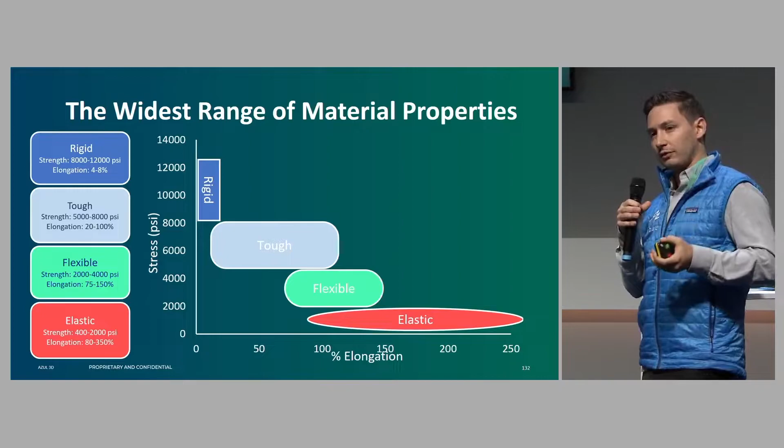Because of that continuous pull, we do custom materials, again targeting production applications, knowing people have different requirements. We formulate materials specifically for your need to be able to take advantage of our system.

First public customer, Wilson, taking over the pickleball world, which is the fastest growing sport of all time in the United States.

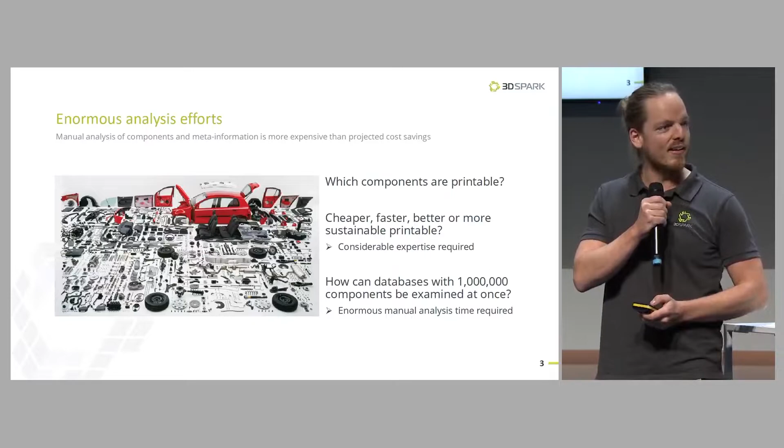Unfortunately, my presentation was not changed. Can we switch to another presentation and I switch the presentation? Is that possible? It's not possible?

That's quite different. Okay, so when it comes to the adoption of 3D printing, we see different challenges. Number one, with 3D printing service providers, like MedShape, actually a great company—go check them out here. Their head of sales says costing and quoting is a big challenge, very annoying and time-consuming for them.

And why is that? Because every morning he opens his inbox and has a lot of RFQs, requests for quotations. That's exactly what he wants, it's great, but it means a lot of manual analysis—forwarding CAD files and drawings to his technology experts. They check for printability, feature sizes, distortion, for example, and feed back that information, as well as some metadata they get from the CAD files, like bounding box and volume, and then he feeds that into his Excel tool to do the quoting.

So that process works, it's however a bit lengthy, involves a lot of tools, and it doesn't scale. That's one problem.

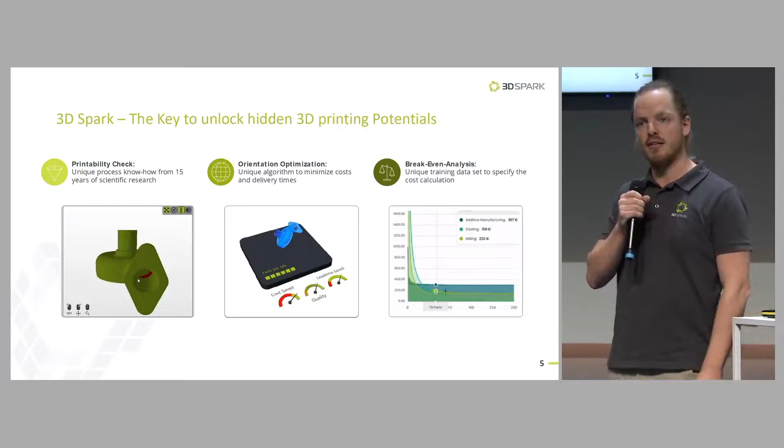And I'm not sure if there's a...

Also, that slide is missing. That's the best way to do it, honestly. Awesome, still an awesome presentation, believe me.

So you mentioned Alstom. Are there any customers or applications where your software already helped in finding the right parts to print? Yeah, so in this case, the railway industry, we identified more than 600 validated use cases. They were printed with various different technologies, and with that we were able to save 1.8 million euros in cost.

And on the other side, the manufacturing service providers do their quoting with our software. So if you mention railway, are you rather focusing on Deutsche Bahn, for example, or the producers of trains? Both. More the producers, but Deutsche Bahn is also a customer of ours. They use our software because they do both. They do sourcing, so we help with the make or buy decision. But they also produce themselves now, since recently. They have their own printers, so they also need to do their own quoting.

Great, great presentation. Any questions from the audience? If not, I say thank you so much. It was very spontaneous and still very good. Thank you so much, Ruben.

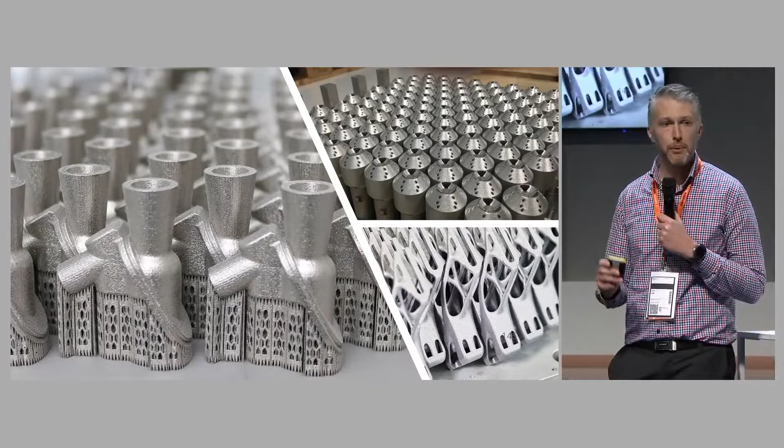Laser powder bed fusion is rapidly moving from a case where it was printing individual parts and prototypes into a case where you're making many of the same part in batch or serial production. As an industry, this is incredibly exciting, that we're at this tipping point now after these many, many years of development. But the difficulty now becomes: how do you identify the non-conformances inside a batch? The methods of quality assurance for additive manufacturing are still somewhat limited by our traditional techniques of inspection.

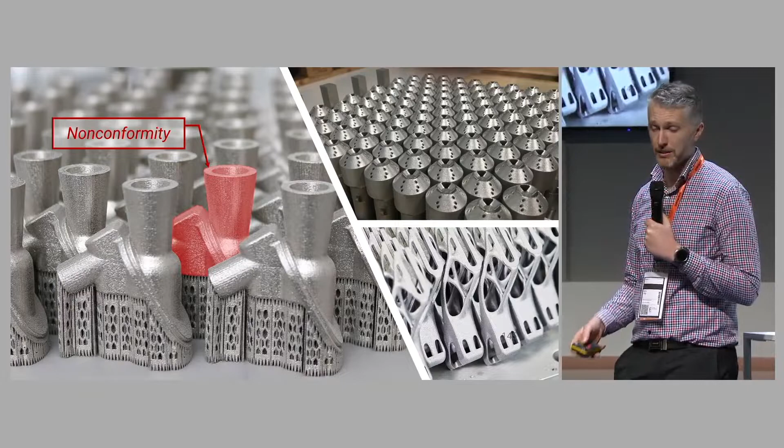So this is what we're working on directly. Apologies, there's been a bit of a formatting issue here by the looks of it. But in situ monitoring enables us to unlock the value of additive manufacturing through inspecting every layer, layer by layer, to identify any anomalies that occur in your parts.

The benefit here is that if you can do this across a series of parts, you can quickly establish metrics that enable you to determine quality specifications for your entire production series. And this is really unlocking that next stage of capability. We've developed a proprietary methodology that is a long exposure-based technique that's both data efficient and also very fast to analyze these parts and results.

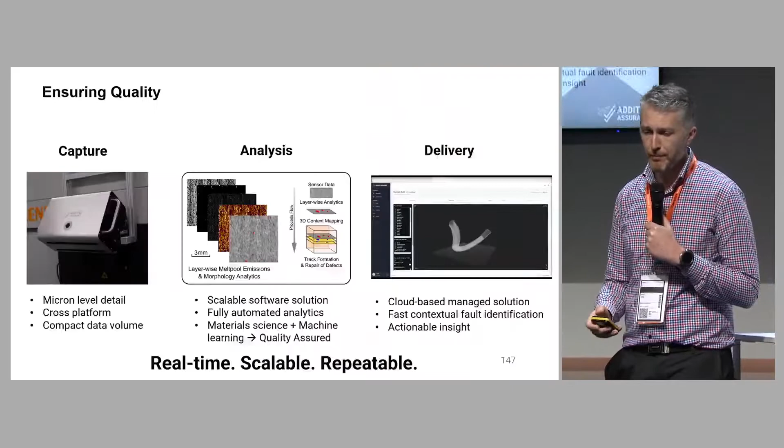So how do we do that? We've developed a sensor package, analytics suite, and a methodology to deliver this back to the customer. So it's an all-in-one encompassing package that we sell as a subscription service to the end user. It's on the market today, by the way.

So how we do this: we have a retrofittable sensor package you can see on the left there. This enables you to capture detail of the process down to the micron level, greater than 30 microns per pixel across the entire powder bed. That enables you to identify those small anomalies in that laser powder bed fusion process that is so critical to establishing quality specifications. On top of this, we've developed machine learning-based algorithms to identify those fluctuations and categorize them.

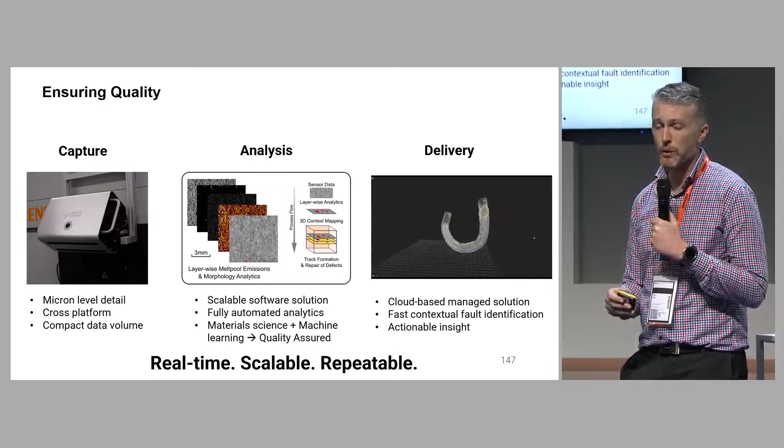In terms of the type of defect that may be occurring inside your part, we finally developed a cloud-based platform to identify and deliver these indications back to the user, so that you can do so with confidence and deliver this to a production floor without having PhDs running the machines, which has been previously quite common. So our optical-based methodology is a long exposure-based technique and can be mounted externally or internally.

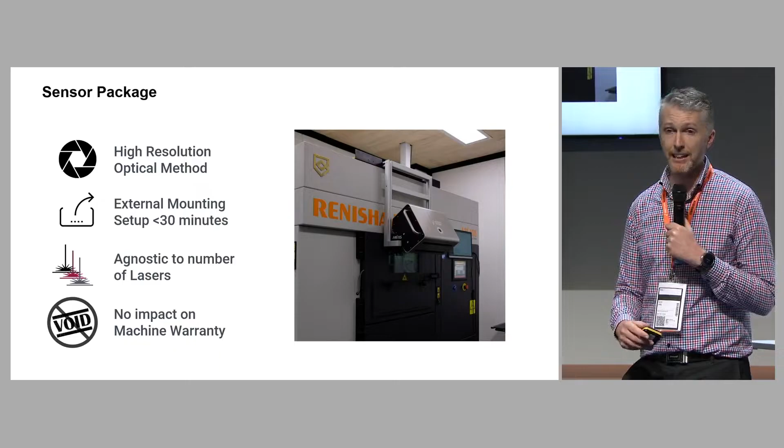We're working with a few OEMs to do this internally currently. This external mounted system, though, can be applied to any of the major vendors that are currently on the market today. So come and speak to us later if you want to learn more about this. The other benefit is that it is agnostic to the number of lasers and has no impact at all on your machine warranty.

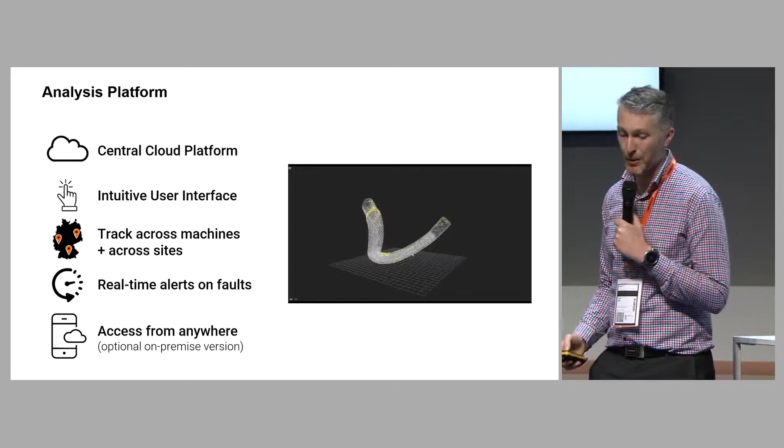I'll leave it there for now, but I encourage you to come and visit us over at Hall 12, where we can dive into more detail about how you can actually use process monitoring to establish that confidence across all of the parts. Yeah, I'd like to encourage you to come over to Hall 12, Level B. Thanks. Thank you so much. Awesome.

Okie dokie. I'm really excited about the next presenter.

Welcome. Finding anomalies in the early stage of printing is one of additive monitoring's key goals. You are now called Phase 3D - you just renamed, I heard that. Yes, that's right, that's why you have this cool jacket. Thank you, looks awesome. You are Niall O'Dowd, is that correctly pronounced? Yes, is it Irish? Yeah, it's Irish. What is the correct pronunciation? Oh yeah, my name's Niall O'Dowd.

Okay, great, so you explain to us how it works. Please, the stage is yours.

Good afternoon everyone, thanks for attending. Excited to share some information. My name is Dr. Niall O'Dowd, I'm the CEO and founder of Phase 3D, and we're doing in-situ monitoring for additive manufacturing.

I believe AM can really dominate complex manufacturing. It's an awesome platform for part repair, weight and cost savings, as well as building complex, impossible-to-manufacture parts just several decades ago. But there are several hindrances preventing even wider scale adoption of metal powder bed fusion and other metal AM processes. Part rejection costs, lengthy and costly post-inspection and post-processing can hold back adoption for aerospace or automotive components that need to be produced fast and efficiently.

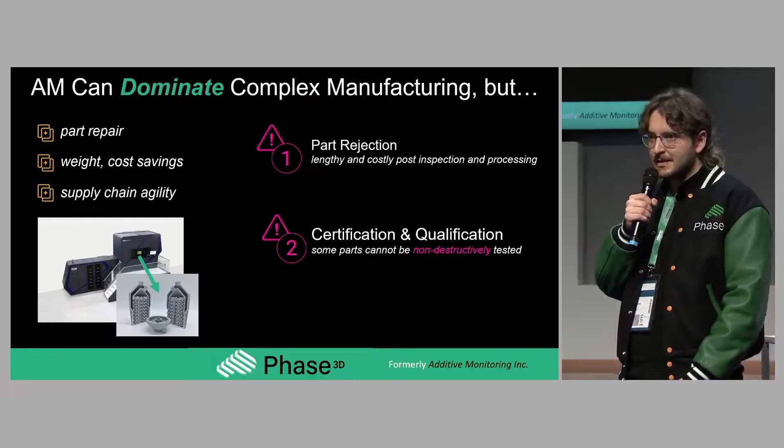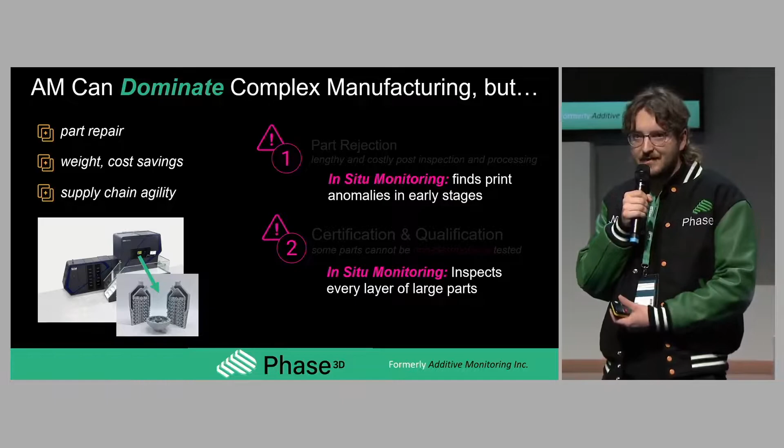Certification and qualification can be impossible in large, dense parts that can't be non-destructively tested. But I believe in-situ monitoring can solve these problems. For example, using an in-situ monitoring solution, we can find process anomalies and part defects during the process, which mitigates a lot of the cost and pain felt from part rejection. Also, because we can inspect the part as it's being made, it doesn't matter how large or how dense the part is, if we have access to those internal surfaces.

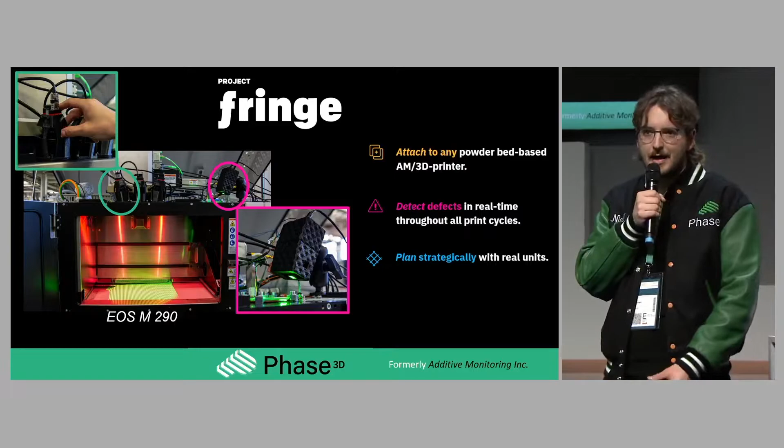So Phase 3D has invented an in-process monitoring system called Project Fringe, which can attach to any powder bed-based AM printer, detect defects throughout the printing process in every layer, and allows users to plan strategically with real units. What makes us special is that we do layer inspection with real units, height mapping, so that users can define thresholds and statistical uncertainty without use of a black box or AI/ML interpretation.

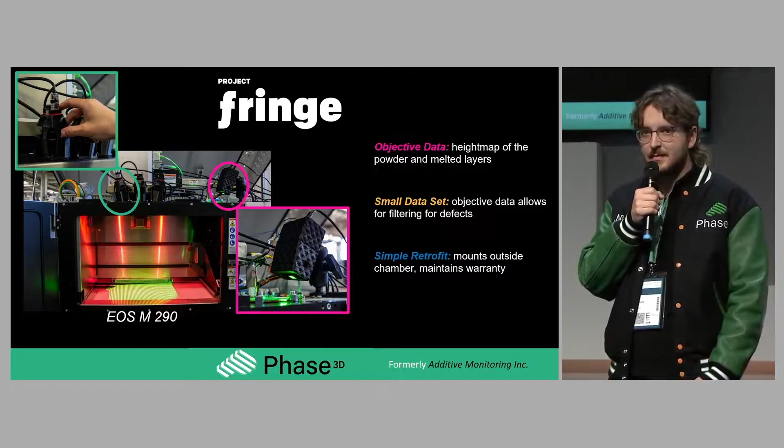So we're able to collect objective data during the printing process. Our data set is much smaller because we know the nominal condition using our height-based thresholding and signal processing. We're also able to simply retrofit any printer just outside the build chamber, so it doesn't impact warranty, gas flow, or process parameters.

This philosophy has really seen a lot of recent traction. We've been selected to do production environment development for the US Air Force, as well as funded by the Advanced Manufacturing Office in the US, as well as a collaboration with NASA Marshall Space Flight Center, where we're working on certification and qualification for their liquid engine printing process.

I'd also like to announce the early adopter program. In January, we're starting a 6-month program where we're looking for contract manufacturers to test and benchmark our system under a data sharing contract, where we can reduce a lot of the license fees. Really excited about this program, and I encourage those of you who print parts and want to limit part rejection and improve certification processes to reach out. We're exhibiting in Hall 12 downstairs.

What a timing, thank you so much. Excellent presentation. Are there any questions from the audience? There's one, please.

The measurement is done after the powder coating, where we look for defects like recoater streaks, hopping, short feeds. Then we do the measurement again after the melting or sintering, looking for protrusions, hatch spacing defects, and spatter particles that combine and land on the part. That two-stage process allows us to look for powder-based defects as well as melted layer defects, and look at the difference in height between the powder layer and the melted layer to find any solidification anomalies that may contribute to lack of fusion or keyhole porosity.

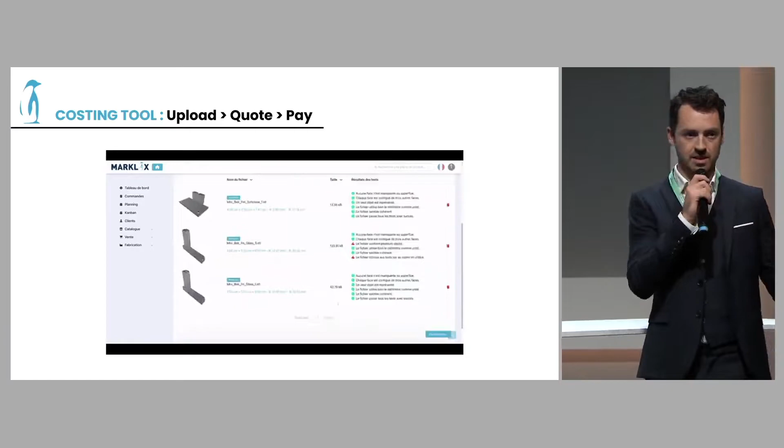So you can upload a part, get a first test to check printability, then you can pay, or you can also ask for an invoice if the service bureau doesn't want to show their prices.

The pricing method we use is completely custom, so it's the pricing method of the service bureau. We don't force the pricing method, that's something very important. To do so, we integrate in the software a slicer, a nesting tool, and everything that is needed for the service bureau.

We are also working hard on a planning module, which is a second step after getting orders from clients. It's to manage the production, and some clients also want to know where the parts are, if the part is already produced or shipped, etc.

We are a startup based in Aix-en-Provence, in the south of France. I co-founded this company with Thomas Boulier, who is actually the CTO of MARKLIX. We are followed and trusted by Bracken Darrell, Logitech's CEO, since the beginning of the company.

We launched our first product for quoting in May this year, and we already have clients in Spain, France, Belgium, and also India. So we have real traction and interest for our software.

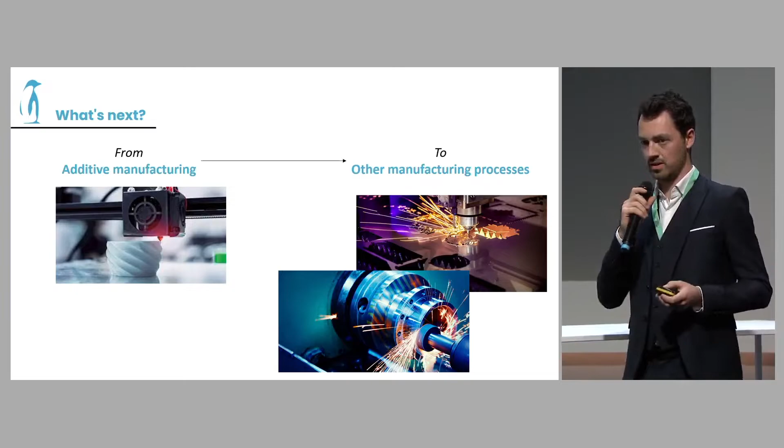Today we are focused on additive manufacturing, that's why we are here. The next step for us is also to do the same thing with traditional processes like machining or metal sheet work. Many thanks.

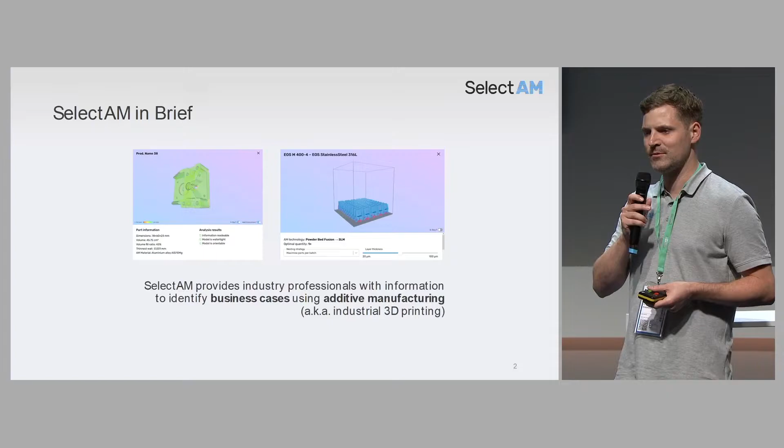As mentioned, we focus on part identification, meaning finding the best business cases for additive manufacturing to really unlock the full potential of additive manufacturing. What we do is described here. We provide information to companies on which parts to focus on, taking a lot of data from those companies, screening down the data, and then handing over that data to OMS systems to get it finally printed.

What is the problem of it? There's a lot of lost potential that we see because a proper part identification approach is not in place. You see four examples here. Often when we come to companies, we see that the data is not fully digitized, so often you don't have a CAD model or there's not all relevant information available.

Secondly, the non-accessibility of AM in companies—it's not linked to services or they don't have their own printers in place, so we can also fix that. Then knowledge gaps related to additive manufacturing. Not every organization has great knowledge in there, and our software can really support you in providing necessary knowledge because the software is data and also process agnostic.

And also today the high cost when identifying parts. Today it's done really manually. You see an example here: often a single part is uploaded to a platform with certain materials and machines, and then you get the feedback that this part is not printable. Then you get to go to another platform and so on, so that's really time consuming. We can do that all automatically with many, many parts at once, giving you the best recommendations for AM to use.

So what is our solution? It's shown there. We hand over a template and, if available, also some CAD data, and then we crunch that data from different aspects. Technical assessment: is this part printable from a technical side, with all the technical requirements that are in there. Economically, if you have a printer in-house or you are using certain services, we can make or buy decision making there for each component and see if that's interesting.

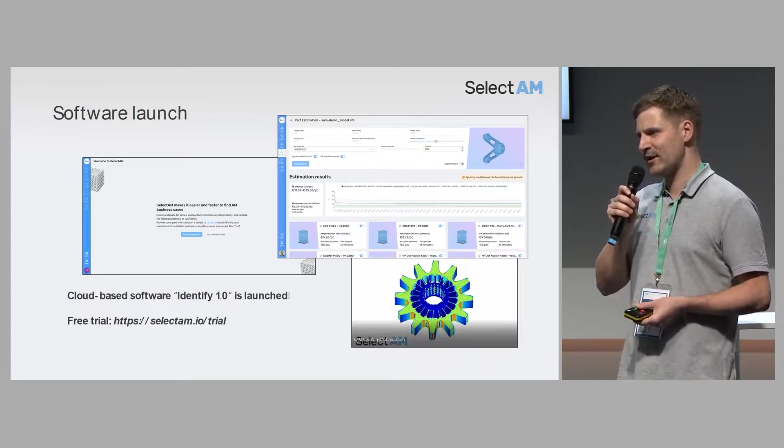So we just launched a software basically two months ago. There's a free trial you can use for 500 components to test it. As you can see, here's some economic assessments—make or buy decision making on the upper right, and down there it goes also into redesign. We visualize the potential redesign potential of your part, and then a designer can grab it from there and start the actual topology optimization process.

So what is our mission, what is the vision after all? There's so many components out there that haven't been screened yet for additive manufacturing. We have really a tool in place that can take 100,000 components, crunch them for different AM processes and different materials, and then tell you which ones to focus on. That is what we do, because today adoption is still very poor, roughly 2.2%, and there's so much more potential with additive manufacturing.

We are moving towards AI, so this whole thing is going to be fully automated and smarter than what it is today. And in the end, we will connect that system to ERP systems and later on to more OMS systems. Thank you.

Great, thank you so much. There's a question: what is the go-to-market strategy of SelectAM?

Yes, so as you can see, we have this free trial option, so everyone who's willing to test the product can do that. And also we're evaluating working with resellers, software resellers, that will resell our product. So those are the main approaches. And of course, this is the first time for us to be present at a trade show, also to get out there and talk to a wider audience.

So that would lead to my question: what is currently your target group in the first step? I mean, of course you're looking for trial users, but would you rather target bigger companies or smaller companies?

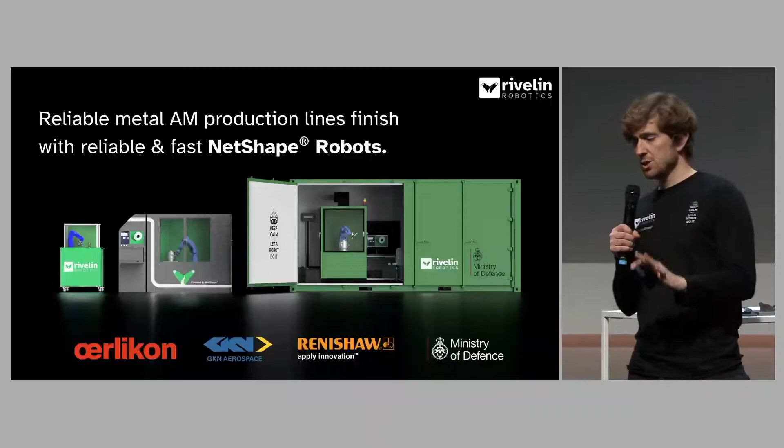This year, Rivelin launched NetShape robots. NetShape robots are for metal post-processing. Rivelin is the first company to fully integrate all of the post-processing steps. If you don't want the expense of a bandsaw or an EDM, you can get a Rivelin robot. If you don't want loads of guys removing supports, or spending months making reliable, consistent support-free builds, you can get a Rivelin robot.

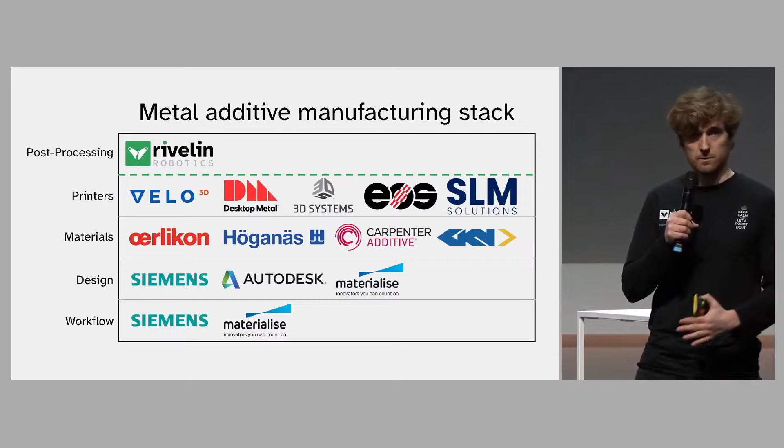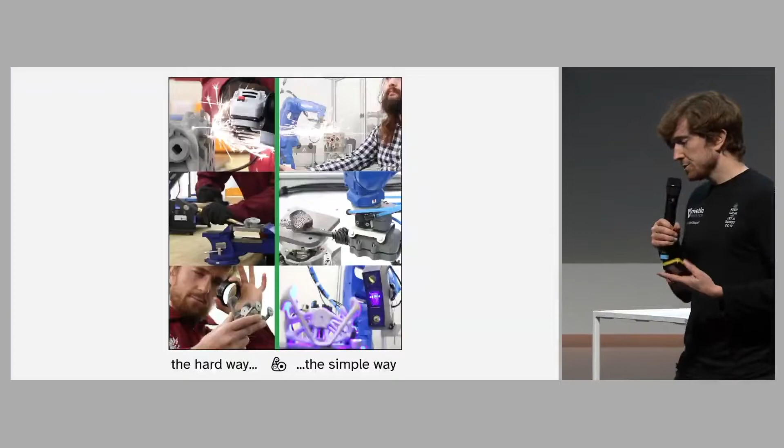If you don't want a measurement step at the end of the line, but you want one in the line, you can get a Rivelin robot. And if you don't want batch finishing, but you'd rather targeted finishing for things like thermal insulation, flow efficiency, and fatigue, you can get a Rivelin robot. If you want to see it in action, check out our homepage, rivelinrobotics.com. There's a video on the homepage.

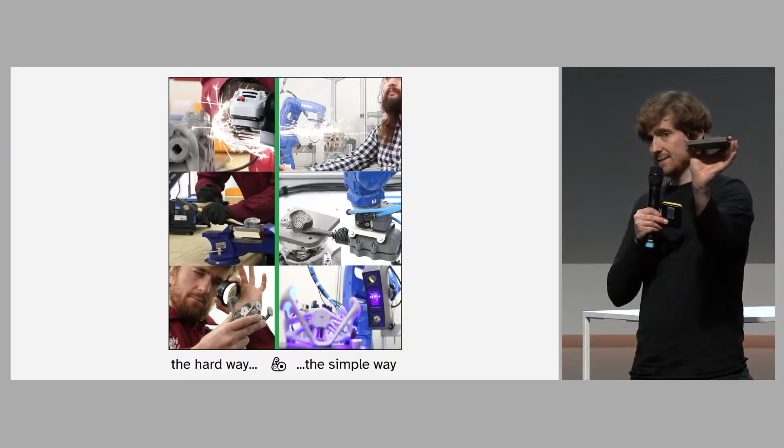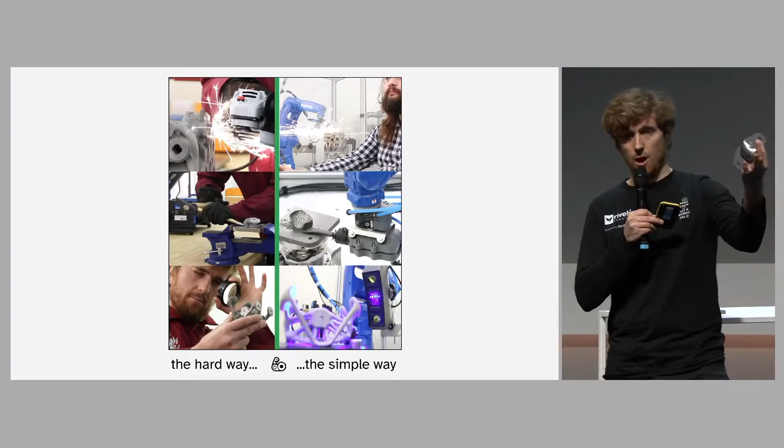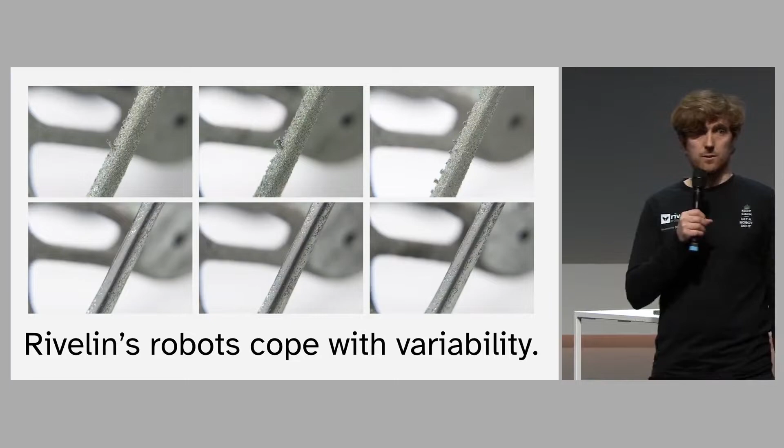Essentially, our robots take a powder bed fusion part, for example with supports on the platform, to a finished state. Automated, reliable, repeatable. And that's because Rivelin's robots cope with variability. There are three strut cases, all different, but one final output. We use a combination of machine learning and traditional deterministic control theory to achieve this.

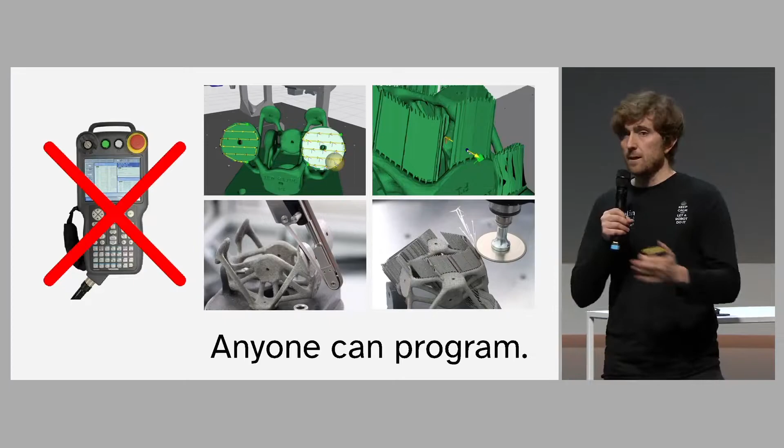And it's important to stress that Rivelin NetShape doesn't need CNC programmers, and it doesn't need specialist robot programmers. You fixture it, and you hit the go button. Anyone can program, it's that simple. And this is what differentiates us from traditional casting automation - the lack of needing a predefined toolpath or a specialist robot programmer. So we get the repeatability of casting automation, but the flexibility of manual labor. So you can deploy robots faster and easier than ever before.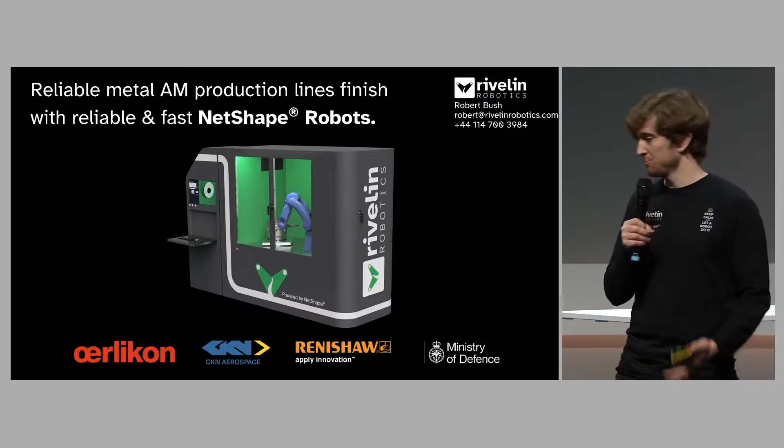Our secret weapon is our team. Ian Halliday has been a pioneer in additive for 30 years, and then the two Davids come from Rolls-Royce Additive Manufacturing and Rolls-Royce Robotics, respectively. So why have the likes of GKN Aerospace, Oerlikon, and Ministry of Defence invested in the support removal and targeted finishing solution from Rivelin Robotics? Well, they understand the pressing need to incorporate metal additive on their production lines, while also overcoming the challenges of post-processing by hand, such as lack of traceability, lack of repeatability, spiraling costs, limited manpower, and risk to personnel. So keep calm and let a robot do it.

I'm always keen on getting to know applications - is there already an application in place where you've implemented your system? Yes, at the moment with the customers I spoke about, we're doing process validations. They have particular parts and challenges, tending to be support removal and finishing, and normally scalability challenges - they can't get the personnel, or quality issues, or sometimes even cost. We're going through those work packages, trying to prove that our system does in fact deliver what we say it does. The outcome, if we succeed, is deployment of a robot onto their line. Of the ones I mentioned, Oerlikon, GKN, and Ministry of Defence, two are targeted for next year if we go well, and the third for 2024.

What about the robot? Is that something you co-develop, or do you work with a common robot producer? This is a good question because lots of people ask this. The robot is Japanese, Yaskawa - we don't develop the robot. Our main addition, let's say, is the software. It's being able to control the sensors in closed loop and being able to program without actually needing to program.

So just giving recipe steps. Let me ask another question because I'm highly interested. If a company already has corresponding robots, do they need to buy the robot you are recommending, or is your software working with any robot out there?

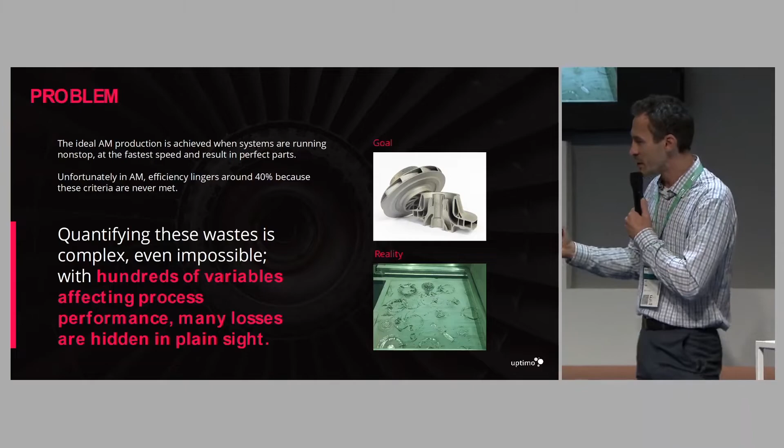So our solution focuses on this idea that you're trying to run a system 24/7 at the perfect speed with perfect output. In each one of those dimensions, there are huge problems that lead to this kind of reality. There are a lot of variables that go into this, and it's not that people are not competent to do this—the problem is they don't have the time.

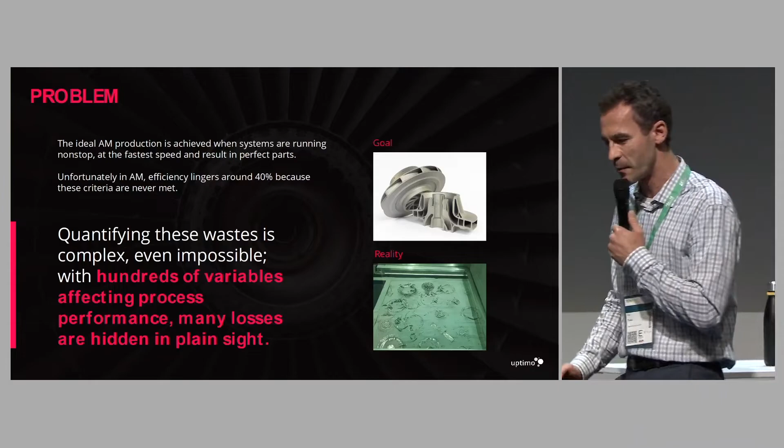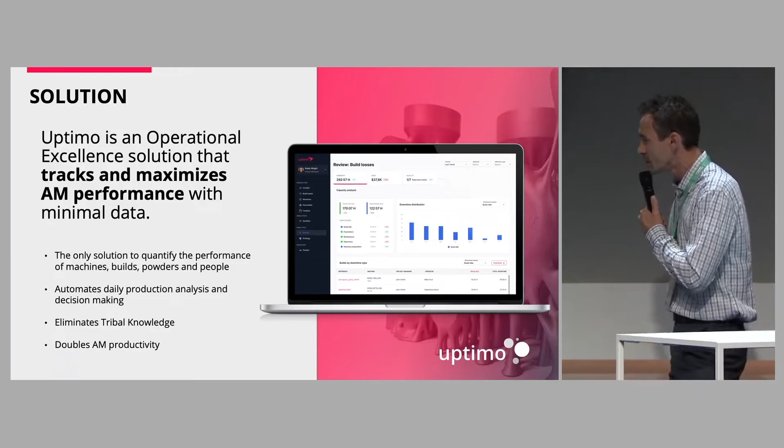So what our solution does is it quantifies the efficiency of your production. It automates all these tasks that you have to spend on every day trying to figure out what is the strategy for today, what are we building, how are we going to optimize it, and then without requiring any tribal knowledge, it doubles the productivity of your systems and also saves you a lot of time.

Some of the key highlights are that project managers save about 20 hours a week in terms of all the analysis that they have to do. Machine operators save about 5 hours. The team, in terms of review meetings, saves about 30 hours a week.

And we've reduced inventory costs by about 1.5 million. And again, this is an example of 10 machine systems, or 10 machines running in production.

With regards to other companies in this space, we focus exclusively on operational excellence, not MES, not ERP. We have a huge advantage there. Other companies that focus on OEE or efficiency aren't in the industry, so their solutions are very superficial. You need a lot of industry knowledge to get to the right conclusions on what to do.

So with regards to the industry, we're focusing on having 1.2 million in annual recurring revenue by 2024. The market is huge and growing, so I think there's really great potential there. Now I'll take your questions.

I'll cut everything else, awesome, short. Awesome, thank you so much. Thank you. Big applause, worth it, definitely.

What is the payment model you have right now? I skipped that slide, but what we do in essence is...

Sorry for that. No, that's totally fine. What we do in essence is we charge a minimum amount because it's not just software, right? We're not just delivering software and then going home. We actually go into the factory and help implement operational excellence, which is a huge process. You have change management consultants for this. That's the other half of our team, which goes into the factory and helps you every week, every month, for the first year, to analyze what's going on and save you that time so you can actually do your job better — delivering products to your customers — and have the time to work on everything with more peace. So there's a high part of consultation already included, right?

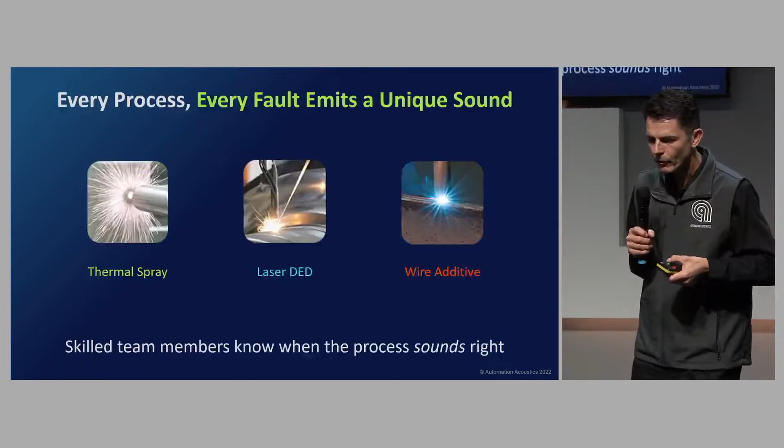Just like a really good operator knows when something doesn't sound right, we do that with software. Because every process creates a unique sound, a new feature, and you can associate that with a problem - that's what we focus on.

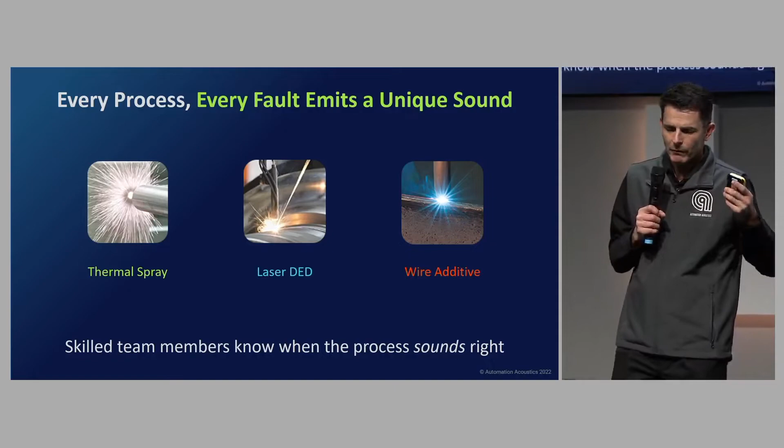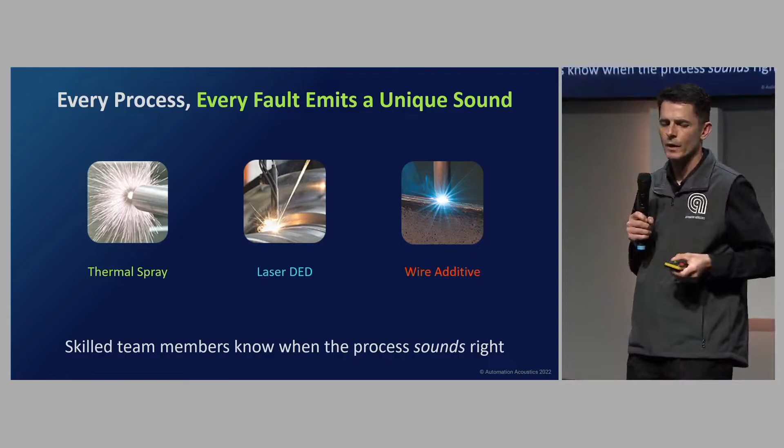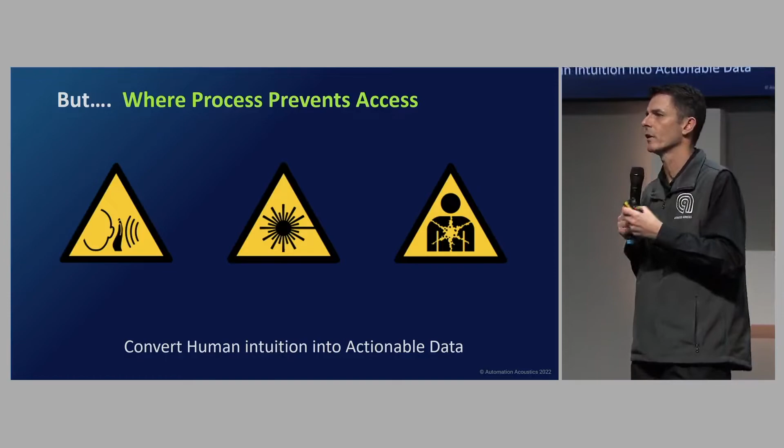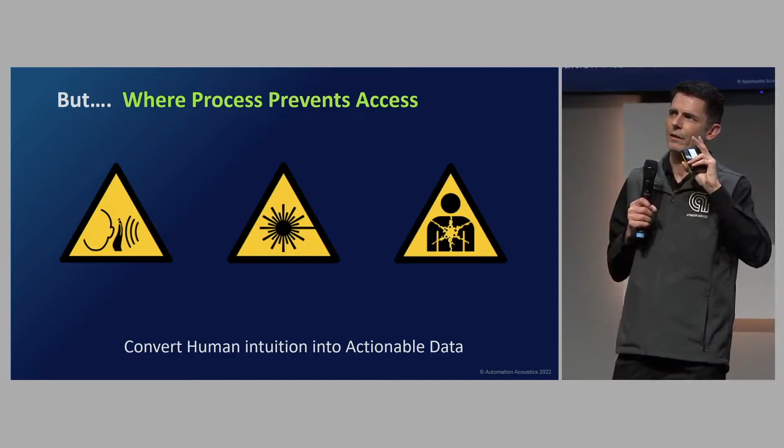And that's what we focus on. But where these processes tend to exist now are in closed rooms - very loud, and you can't work within those spaces. They've got lasers and dangerous powders. So getting that operator to get really close and understand what's going on is getting harder to do. So trying to create that idea of what the human is doing and build that story

into data that's valuable and actionable is what we focus on. So we're a piece of the puzzle - acoustics isn't meant to replace everything, it's a piece of the puzzle. It's part of the information set, just like we look and smell and hear, we even feel the machines we work with. Acoustics is part of that, and it's often regarded as the missing piece of Industry 4.0.

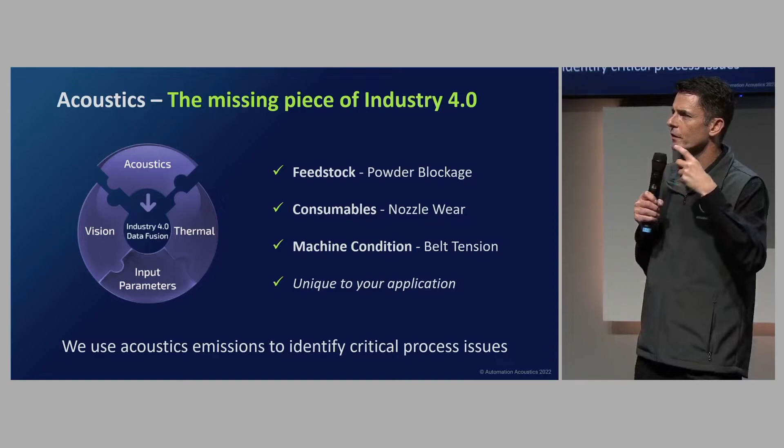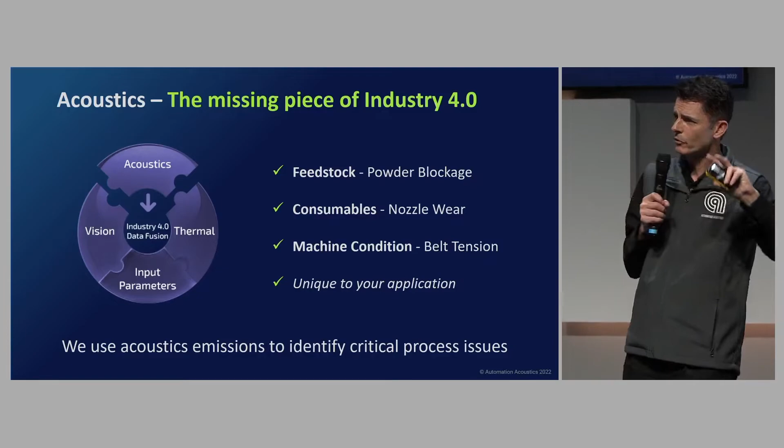So we look for different things associated with feedstock and consumables, when things are wearing out, and machine condition. These have been really interesting things we've focused on, but everyone thinks the process is good, yet sometimes the machines start to drift as well.

What do we do with it? We use it in a way that allows for decision making, and we use a lot of AI-based techniques, machine learning, etc. to filter out things, extract out the things of relevance, and compare it against what you want it to be - that's really what we do. Being able to bring that together really quickly, but most importantly in real time, is how we do it.

So a lot of people ask, what do we do? Well, we take this complex noise and turn it into a very simple data stream. Those simple data streams are just the relevant features you want - we don't worry about the other things. What are the two or three things you really want to know? And then we present it.

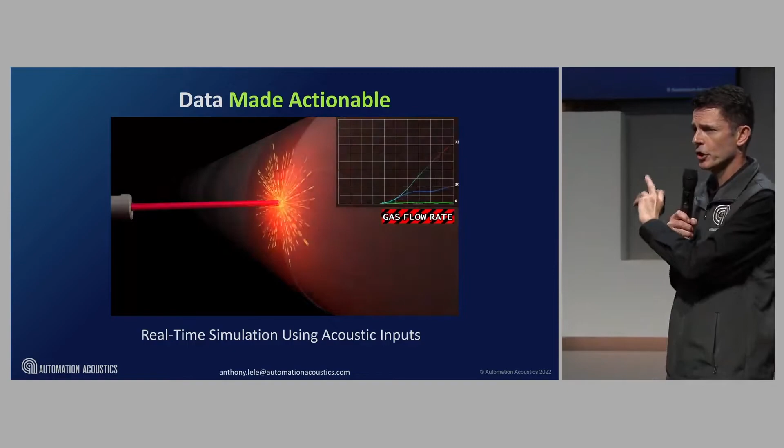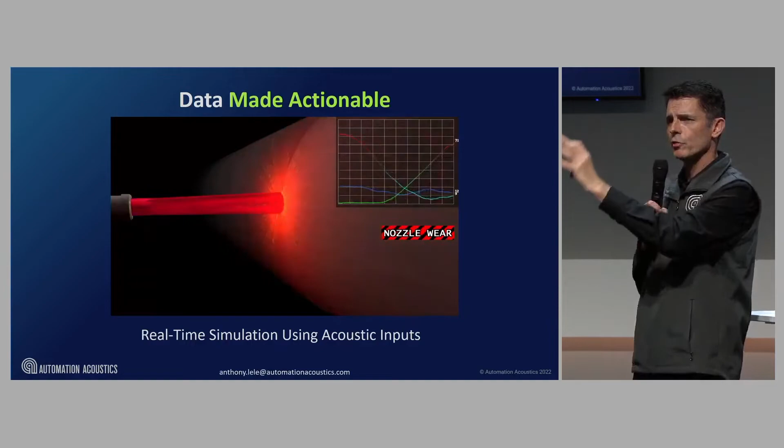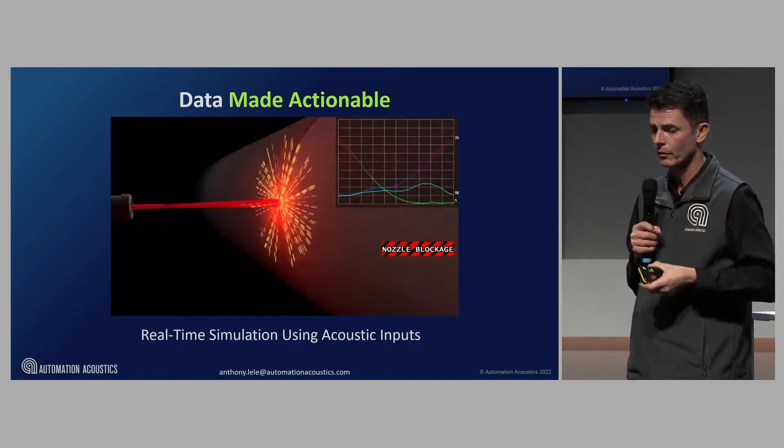This is a really interesting point because you've got to make data actionable in real time. So for our operators, we create real-time graphical interfaces, and these interfaces change based purely on the acoustic features. So if you're working with an operator who doesn't quite understand what's going on, you can actually see, and they can be trained - they start to believe and understand how that sound correlates with the process. You're empowering, training, and getting a really good workforce to get faster at what they do. But the data, of course, still goes into the background and is used for your own information.

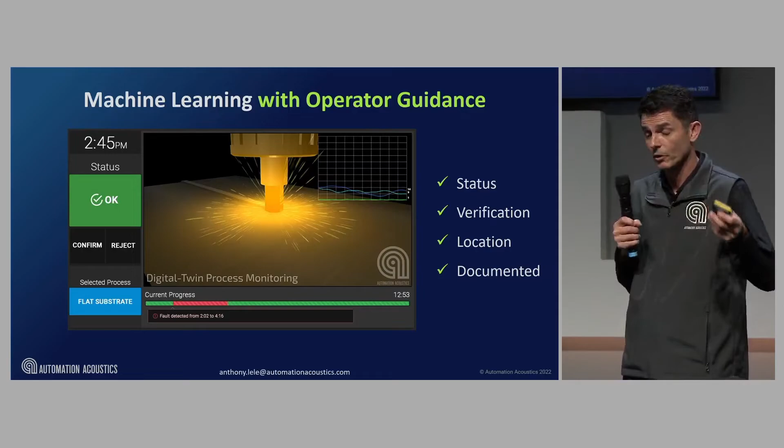So these are typical screens we use. We use our operators - they're the smartest people in the room - to help train the process and train the algorithms, and that's really helpful for what we do. So, automation acoustics, there we are - a real-time digital simulation, it's really powerful. We do this for production consistency. You know what quality is - we're not determining that, we help you get it consistent for traceability and reporting purposes.

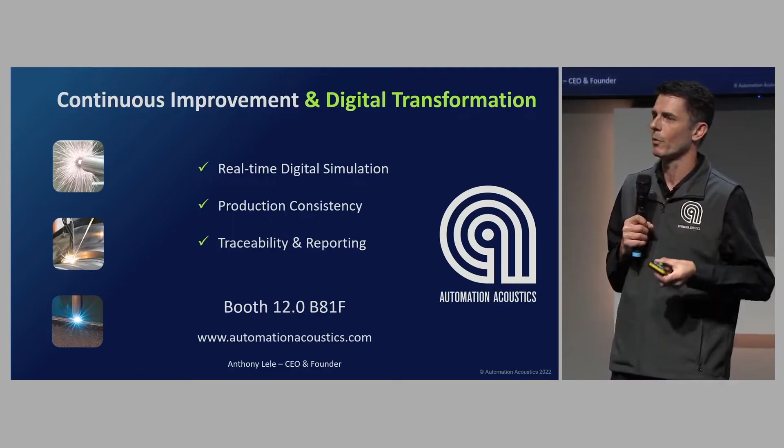Anthony, big applause please. I must admit, if you're not an expert and you hear that, it still sounds amazing to me. So I will ask the audience whether they have questions, because I'm not capable of asking one myself. Any questions from your side? It is amazing, isn't it? So please visit Anthony and his team at their booth, because I think it's worth it, and I will do so too, and try to understand it finally. Wonderful, but thanks very much, amazing.

Stage is yours. Hello everyone, thanks for being here. That doesn't look right. Well, let me just talk to you about this orange thing that peeks out at the bottom. That's a sample we made. The original one is to be seen at our booth.

We invented a new algorithm to generate minimal surfaces, like the gyroid in a way, but adaptable to whatever you want it to be. Our algorithm creates an ideal geometry depending on the geometry that it surrounds, be it a ball or some complex thing, adapting its density, the amount of material it contains, according to your inputs. They may come from a simulation or from a design aspect or whatever. You can do gradients, enlarge things, make the density smaller, and make complex shapes as the one you see in the center, which is a satellite bracket we developed for the European Space Agency.

The main difference between what we do and the classical triply periodic minimal surfaces is that we have a geometry that reacts equally in all directions. It's an isotropic material which has properties that are scaled linearly. Take half the material, you get half the strength. The geometry does not have an influence anymore on how strong the material is, just the amount of material that is placed by our algorithm.

We have 4 products that we are launching. We have an infill service, a web service that takes no input, just a model. You can see the bunnies on the top right, within which we can automatically fill this structure that is maximally light and using the least material possible. We have a configurator software where you can build density fields that are then translated by our cloud service into this minimal surface geometry. We have an engineering version of this software, launching next summer, which will allow for the integration of simulation data. And we have the generally applicable API, to which everybody can gain access and create their surfaces themselves.

Yeah, that's it. Sorry, a bit thrown off by the chaos. You never say sorry, I mean, sorry that you haven't had the right presentation, but you did it quite well. So I think we got the point.

Any questions from the audience? If not, I'll ask a question. I've seen the nice bunnies as an example, but what are current applications that you already improved or optimized with your software? Do we have one you can mention? We did a part for a wafer inspection machine, about 70 centimeters large, in which we could save 42% of the weight while keeping the mechanical and vibration requirements alive.

What are the main industries you are tackling with your solution in the first place? At the moment we're working with high-tech industries, aerospace and medical, but this is aimed at everybody. We're also addressing the maker scene, as well as normal industries. Everybody that wants to start using AM could do it with our system because it is printable without supports, even in SLM, so you can print efficiently without having to choose your best orientation.